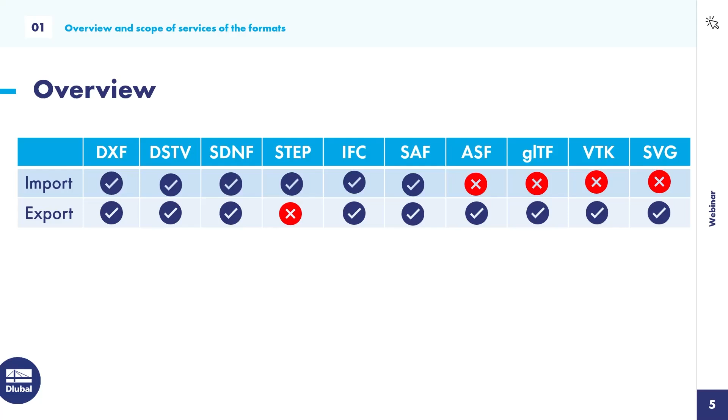We will start with the DXF interface and a brief overview about the import and export possibilities. Concerning the import, we mainly support the import of nodes and lines. You can, however, also import members from the DXF format. To do so, you have to mention the cross-section and optionally the material name inside the layer. Then we can read this information and automatically create members. We can also import surfaces from AutoCAD, however, only if the object is a 3D face element.

Then concerning the export capabilities, here we mainly export nodes and lines. So members with the graphical rendering in RFEM will be exported as a simple line, not as a 3D rendered object. We can also export dimension lines, and concerning the results, for example, the FE mesh or the deformed structure, as you can see here on this graphic.

One more information regarding the import. There are 2 options. We can import the DXF information directly, so you get the lines and the nodes and so on, or you import a DXF as a background layer. That is, of course, also possible. Now I would like to give you a quick demonstration of the import and export. I'm starting with the import.

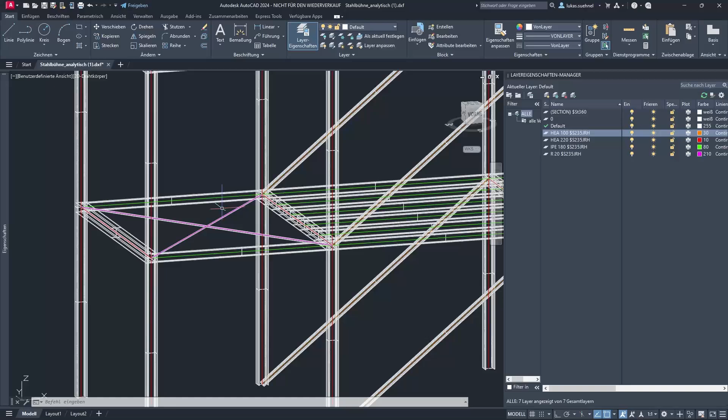And I also assigned the cross-section and material name to these layers, as you can see here on the right-hand side. The HEA 100, then the $ sign that splits the cross-section and the material name, and then the material description or name. So if you have that, you can import this into RFEM 6. I already saved it as a DXF file, so there's nothing to that.

And then I can go into RFEM 6, go to File, Import, and use here DXF2. I can select the DXF file, and then I will get a little dialog that allows me to define additional settings. First of all, I want to rotate the structure because otherwise it would be upside down due to the global coordinate system. I want to generate the members based on the layer names.

And I also want to import only selected layers. So in that dialog, I already see which layers I have inside that DXF file, and I'm not interested in the default or the specific section layer. I only want to import the center lines, basically.

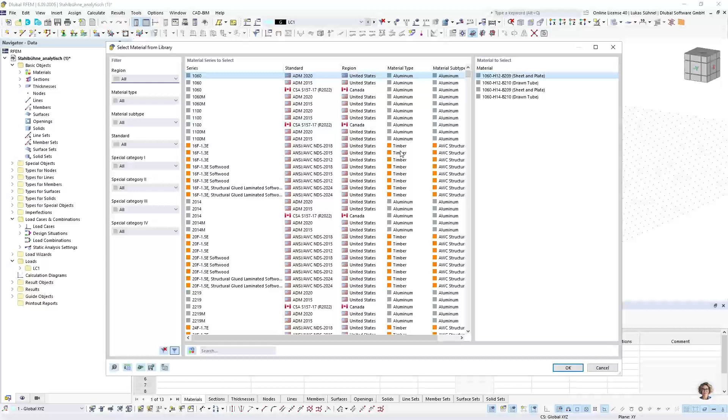So let's do that. We'll take a short moment. The cross-section or the conversion tables will open. So in case your layer names do not match the cross-section or material name inside RFEM, you can define them in this conversion table, assign the related Dlubal material or section, and then you can import it. Should be filled correctly on my side here already, so I don't have to do it.

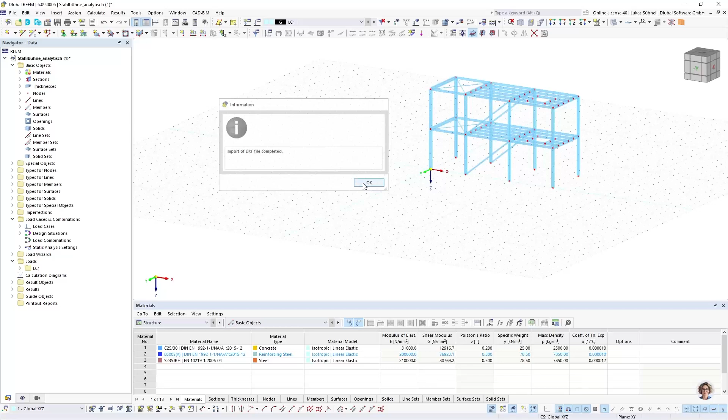I just click OK. And now RFEM will lock itself. You can see it on the bottom. Everything is grayed out. I can't do anything, and this is on purpose. We are using our API to read this data, and while the API is working, you're not allowed to do anything in RFEM. So we are locking the screen. The import is finished, and you can see the same structure here in RFEM now.

We can briefly check the imported data, for example, by using a specific display function. I can use colors of rendered objects by object property, member section, for example. And then I can quickly double check if I have the right sections in my file. So basically if the conversion was set up correctly.

Or you are running additional checks, for example, under tools, you have a model check for identical nodes. It shows up quite often that in DXF files, there are nodes very close to each other or multiple lines on the same location. And we have these model checks that can help you to find these situations. For example, you can set the tolerance for identical nodes to 1 centimeter, and then you can check if in a radius of 1 centimeter there's more than one node, and then you would see those nodes here. It's not the case here, so should be fine.

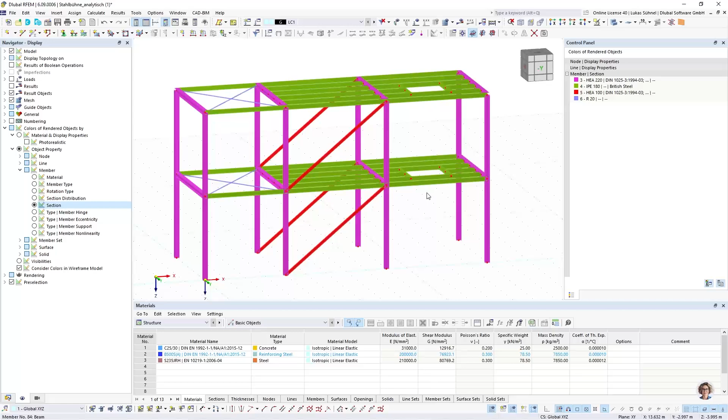And with this data, with these native objects, members, lines, and nodes, you can continue with the loading, the supporting, adjusting the structural model in general, of course. That is the DXF import. And now I also want to show you the export. So let's open another file. I have them prepared, of course.

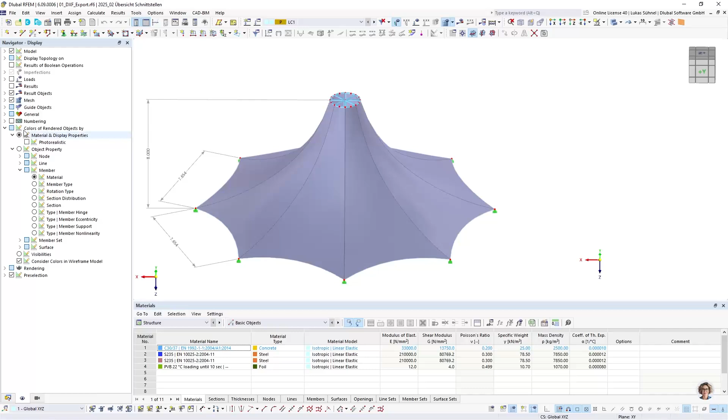That is a membrane structure. A little tent, basically. And let me show that quickly. All right, so here already with the results, but I can turn them off. So maybe just some brief information. In RFEM 6, you're able to run form finding calculations.

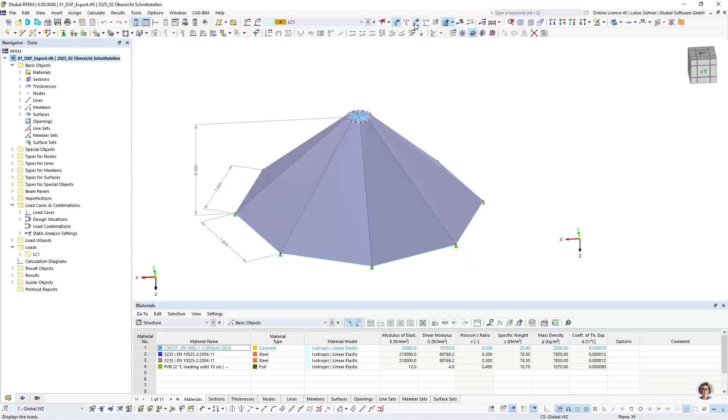Therefore we have this specific add-on, form finding, that allows you to model these membrane structures as we have it here. You can support these membranes on the bottom, for example, via a cable, and on top via this supporting circle of beams. And then you need a pre-stress load case, and inside the pre-stress load case you can define the target force or the target stress or the target sag of membranes and cables, which has been done here.

And then you can run the form finding, and RFEM will calculate the shape that is required to fulfill these predefined loads. Now that is the result, and it is quite common to export these structures into AutoCAD for additional drawings and so on. So we developed not only the DXF export, we also included here options to export the deformed shape.

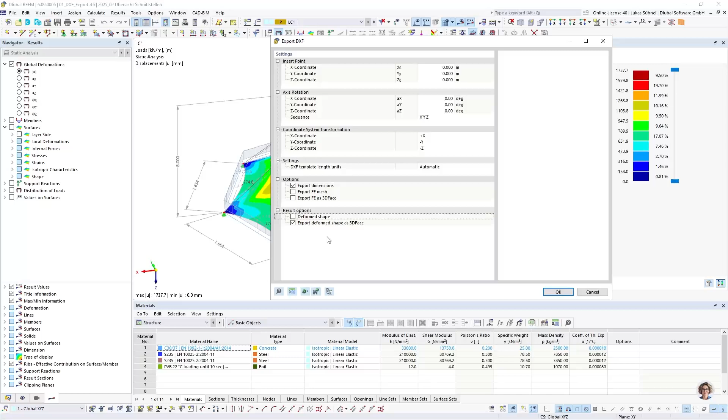Put it on my desktop. And I have here various options for the export. I can export dimensions. I can export the original FE mesh, so the FE mesh that we create before the form finding analysis, but I'm not interested in that. I can also export the deformed shape, or actually I'm just looking for the deformed shape as a 3D face, which helps me with the rendering. So these are the settings.

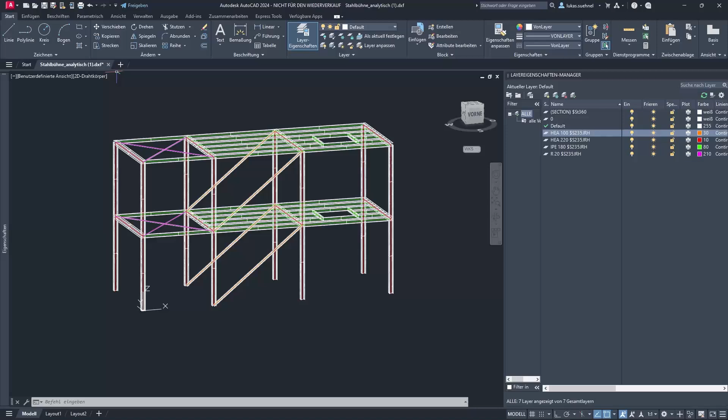I press OK. RFEM should be locked again in a second, because we're again using our API. Yep, happening now. And as soon as it's finished, it will unlock and give us a message, export is done. Now I can go back into AutoCAD, maybe close this file here, and then I can open the deformed shape DXF. Let's zoom in. So that is the result.

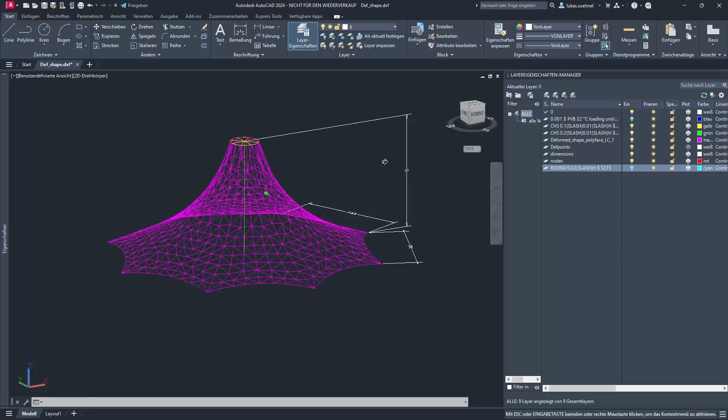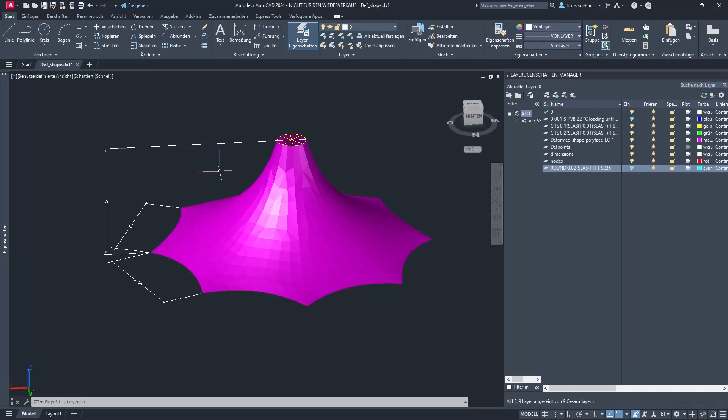Now I can hide a couple of layers which I'm not interested in, these cables, for example, on the bottom. And I can display the deformed shape, and I can also use a different rendering setting for a nicer graphic. We can also see the dimension lines. It's not just simple lines, it's a real dimension line where I can change the settings and so on. All right, so far regarding the DXF interface.

Let's already go to the next one. And the next one is the DSTV interface. The DSTV file format was developed and introduced by the German Steel Construction Association. I have a product description from 2000, so it's a rather old file format, but it has many strengths when it comes to exchanging pure beam structures.

It contains relevant information such as cross sections and materials for the members, but also supports, hinges, eccentricities, member types, sets of members, member elastic foundations, and concerning the loading, the typical nodal loads, member loads, imperfections, and of course load cases and combinations.

Due to these diverse options and the simple definition inside the format, which I will show later, it can be found in many programs. So many of the steel detailing, but also other programs, use or offer an import and export into the DSTV file format. And I listed some of them on the bottom: Tekla, HiCAD from the, let's say, steel detailing area, then CADWORK, HSB CAD, SEMA from the timber construction world, but also additional programs, BuildSoft, Infograph, and many more.

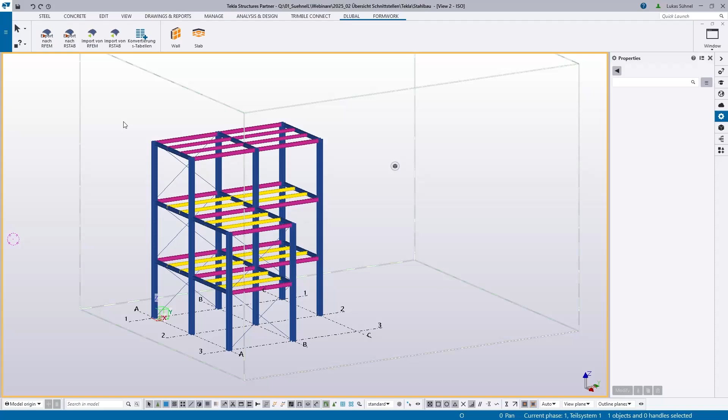It's working quite well. But a direct interface always requires having both programs on the same PC. So you need to have Tekla and RFEM on the same PC. That is not always the case. And then a file format for the data exchange would be quite handy. And we have that for Tekla. And I want to show how you can do it.

So first of all, you select those objects that you want to export. Then you can open this menu, go to export. And now, not so well known, I would say, is the FEM export. And here you find the DSTV file format. You can select the output file location under the parameters tab. So I put it on my desktop.

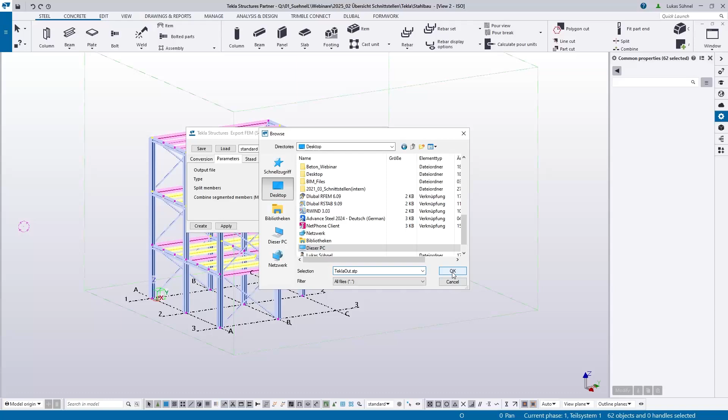Tekla out. And little hint, add the .stp description here, then it's easier to find it in RFEM 6 when we are importing it. Press OK. And then I guess you have to click on apply and create. And the export should be done. Let's have a brief look. I will open the file.

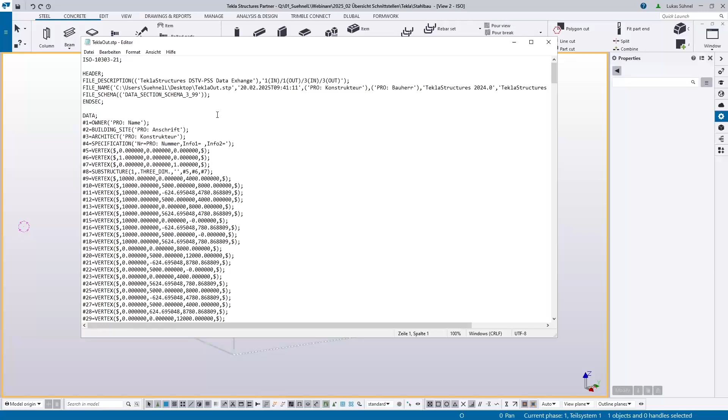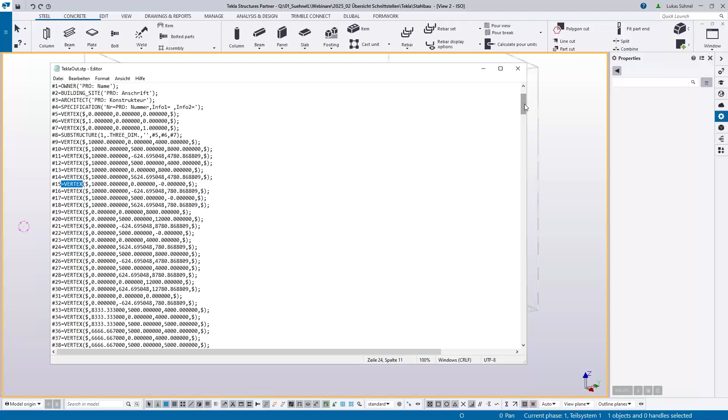This is how the file format looks. So you can simply open that STP file with the editor, and you can see the program it originates from. You can see maybe even the person who created it, the version of the program, and then you get a long list of nodes. So vertex is basically the node. Coordinates, then we have the material, we have the cross sections. Here the focus is usually on the name.

Because we are converting the names anyway, it's not about importing the cross-section values or something like that, which can also be documented in here theoretically. Tekla doesn't do it. And then after materials and cross-sections, we have these elements, and these are basically the beams. So the beam or the member type, start and end node, the cross-section at member start, cross-section at member end. So it's possible to exchange also tapered members.

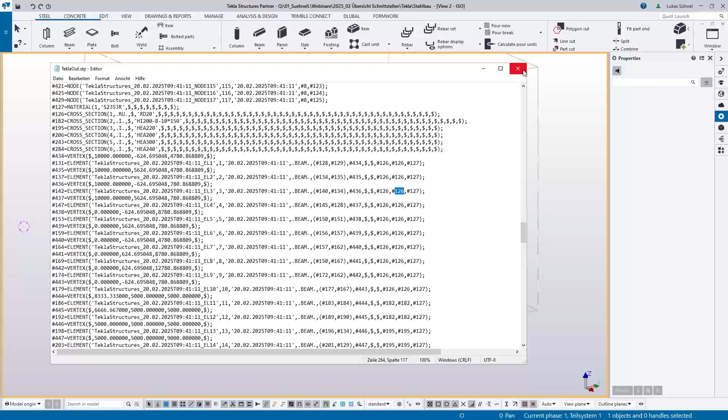And further down, there can be more information about loading and hinges and so on, which is not the case here. All right, so let's import that file into RFEM 6. I'm closing this membrane structure. File, import, DSTV. Desktop, just navigating into my folder, Tekla out. Okay.

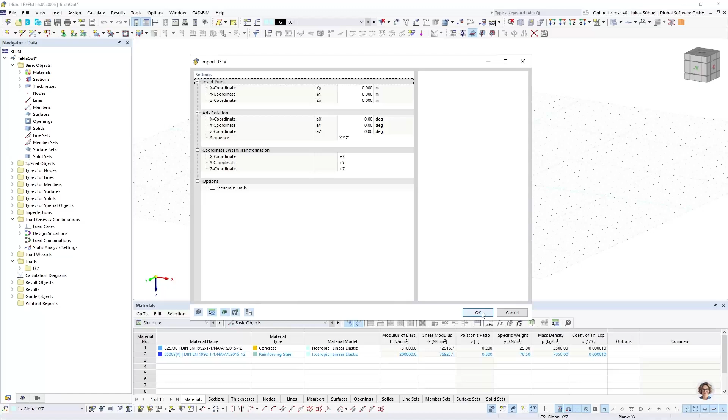RFEM will be locked again after I press OK in that screen. So I could import the loads, but there are no loads inside, so I leave this toggle unchecked. Then again, conversion tables to match the section names. I did that already here. I can press OK, and the import will start. All right, so import finished.

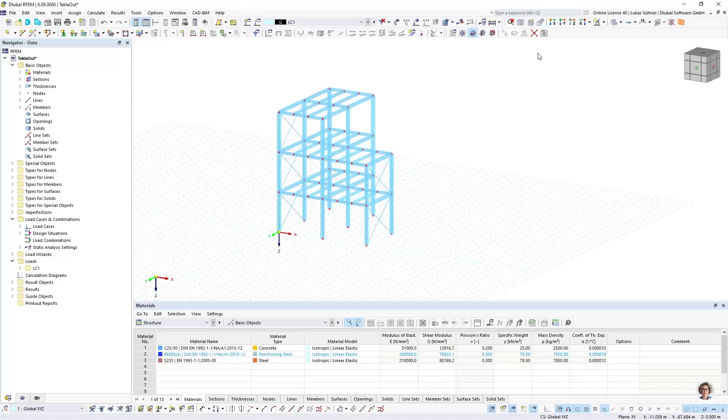We have a couple of free nodes which have no use in that moment. I can get rid of them by going to the edit menu, select, and then we have an option free nodes. And then all of these free nodes will be selected, and I just hit the delete button on the keyboard and they are gone. And now you can see we have the same structure as we had in Tekla.

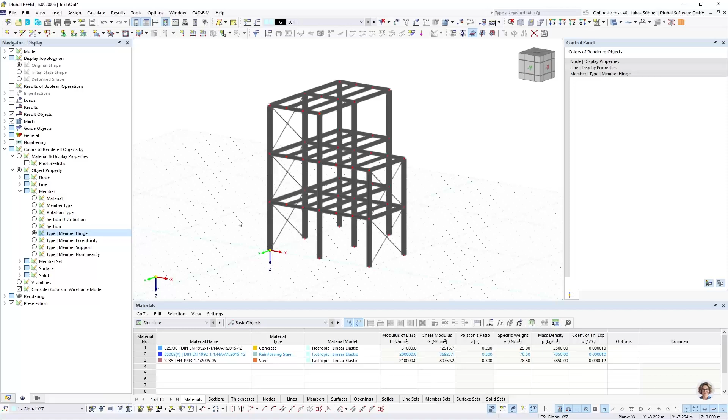Again, I could double check the content by using some rendering functions for the cross sections or member types. Here I can see it's just member type beam. And if I would select the member hinges, there are no hinges assigned. So I got a model from Tekla where every beam is connected rigidly to the next beam. That is not ideal. In RFEM, I would continue now with adaptations concerning this analytical model.

Some of these adaptations could be the following. Let me show the rendering via material again. I could select all these bracing members and assign them the tension member type, and this can be done rather quickly.

I have these synchronized selection options in RFEM, so if I click in the data navigator onto a specific cross-section, all members with that cross-section will be highlighted. There's no need for me to manually draw little windows. Just select the cross-section, then double click on these members and change the member type to tension member.

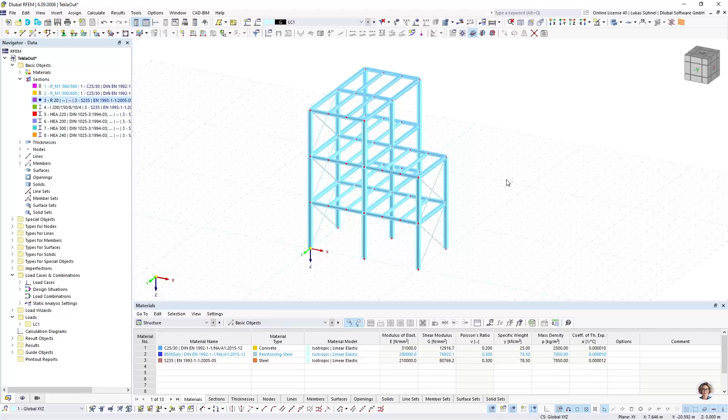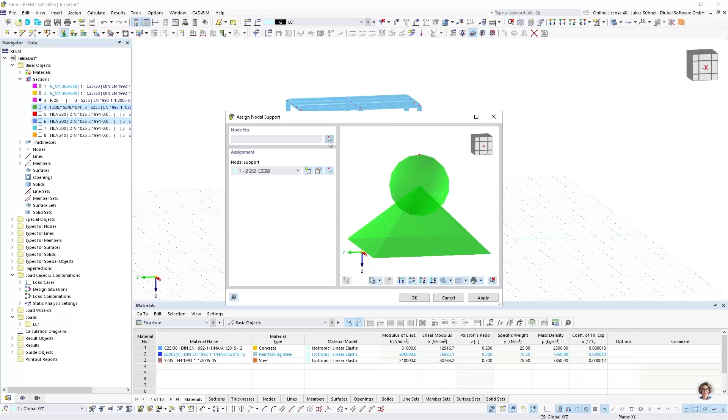The same could be done for some of these smaller beams or horizontal beams. I'm selecting these cross-sections here, double click, and define the member type as truss, which means it is a member with hinges for the bending moments at the end. I could assign supports and all the things that are required, and then assign loads and so on.

And of course I can also export this file again into the DSTV format. File, Export, I put it again on the desktop, RFEM out.

Again, takes a little moment. All right, RFEM out - I can open it with the editor.

We have, in general, the same information inside here, but we sort them a little bit differently. We have chapters: coordinate system, nodes, then cross sections, materials, and again the members. You can see here now we have tension members, truss members, beam members, so there is definitely modification visible.

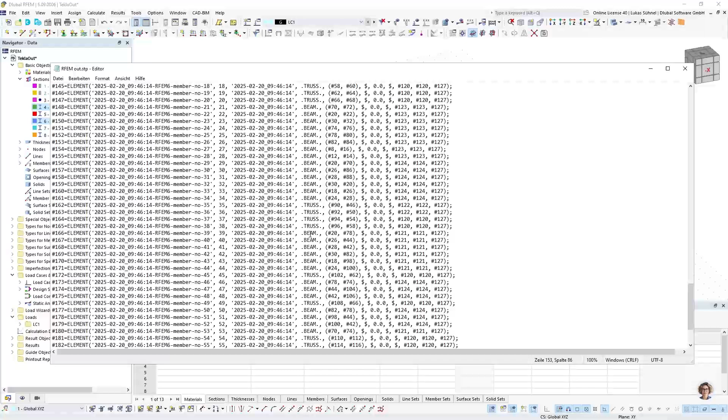This file can of course be imported into any of the other mentioned programs. All right, let's go to the next file format, the SDNF format.

The name should be Steel Detailing Neutral Format, so a neutral format for steel detailing. It was developed by Intergraph for the purpose of exchange between structural analysis programs and steel detailing programs. You can see under additional programs that it is mainly used in steel detailing programs like Advance Steel, HiCAD, Tekla Structures, Aveva E3D, and so on.

It can be used for the transfer of beam structures - materials, cross sections, uniform members (no tapered members), and eccentricities - but it also supports surfaces, including openings, at least on our side. The format has more capabilities, for example connection details, curved elements, and loads, which are currently not supported in our export or import.

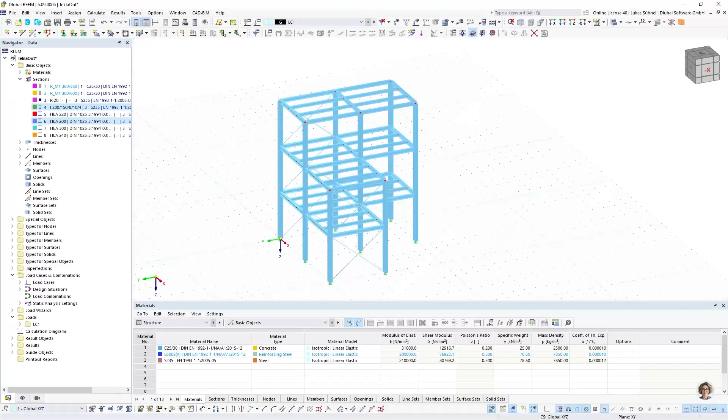Let me also give you a brief demonstration of that format. I will close this file and open another one, which is this one - like a cantilever truss structure, if you want to call it that way.

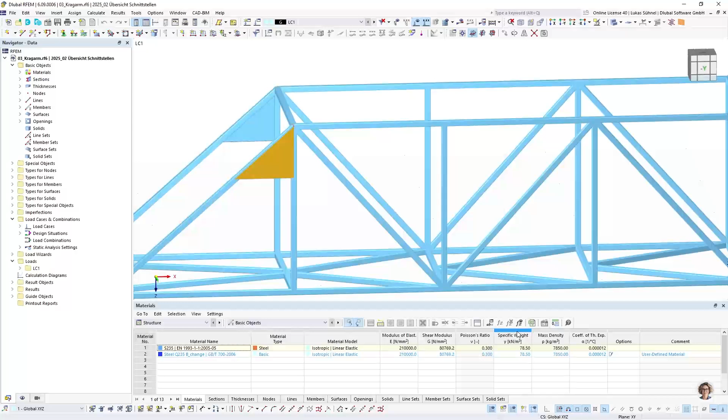So mainly beams, but also some surfaces here, 8mm thickness, to get a more rigid steel joint in that area, and then on the end also a surface with an opening. That is maybe the structure that we want to give to the steel detailing person to save a little bit of time with the modeling. And we can do that.

My plan is to import it into Advance Steel, and for Advance Steel the ideal format from our side is the SDNF format. So I go to File, Export, SDNF. Under the desktop I will save this.

How do we want to call it - I want to export linear members, surfaces, and openings. I press OK, and while the export is running I will look for Advance Steel on my PC.

All right, let me call up Advance Steel. I can use this menu for importing files. Here, however, I won't find the SDNF format - you can find it under the Export and Import menu or tab, and then you have additional formats: IFC, CIS/2, SDNF, which we are going to use, but also the DSTV format and others.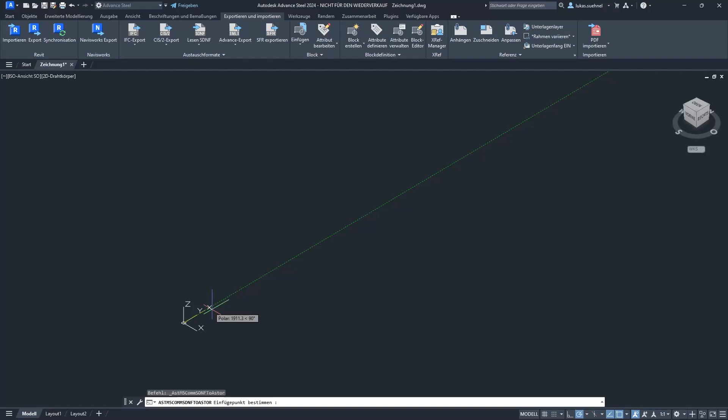Let's see, sometimes we have to do a cross-section conversion similar to our program. The Advance Steel is reading the cross-section names from the SDNF file, and if it doesn't know what Advance Steel cross-section it should be assigned or use, then you have to assign it manually. I did that for the German webinar already, so the window didn't pop up here, but we have the cross-sections, which is the most important part.

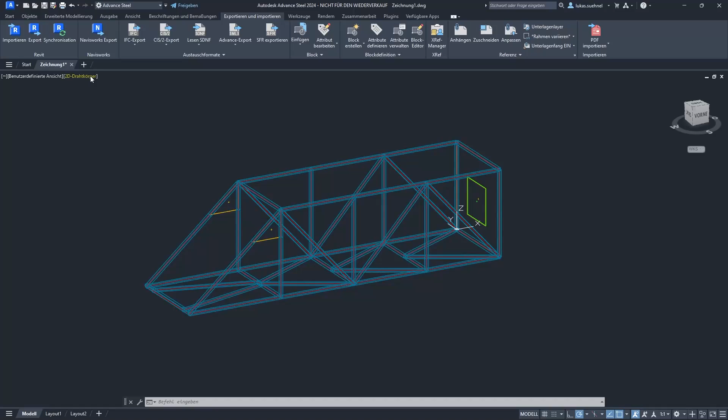Now let me change the rendering a bit, and we can clearly see that the import was successful. I get the same structure, and it's not just graphical objects - we can also see the information here, so thickness 8 mm. I can display the cross section.

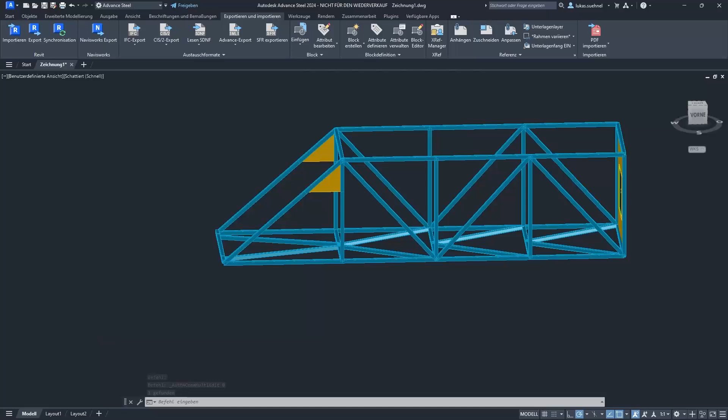Hollow cross section 40 by 3. So we got the information that we need, and now we can continue in Advance Steel and assign, for example, the connections.

This could be done via the advanced modeling, and then I have here a connection manager, which shows up on the wrong side. Okay, and for example, I want to have a connection in that area.

So I could select here, let's say, fin plate with 3 connected diagonals. So I select the main beam, then the first diagonal, second diagonal, third diagonal. Then I will get a preview of my connection. I can rotate it a bit.

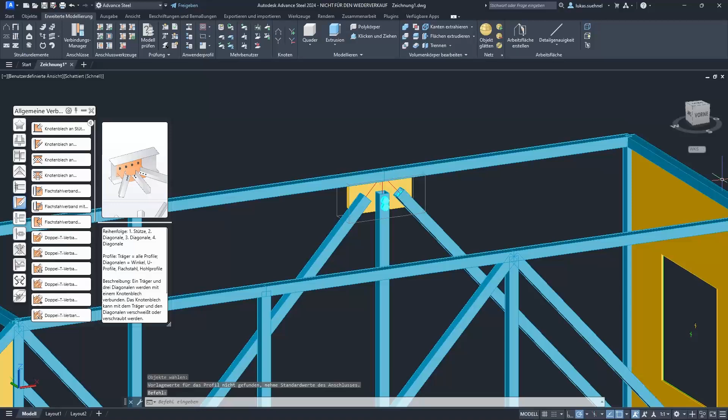And modify it further in the other dialog that shows up. For example, I could modify the fin plate, or where is it? The amount of screws, the diameter, so maybe diameter 12, just 1 screw or bolt. And when I'm done, I can close it and I have my connection here.

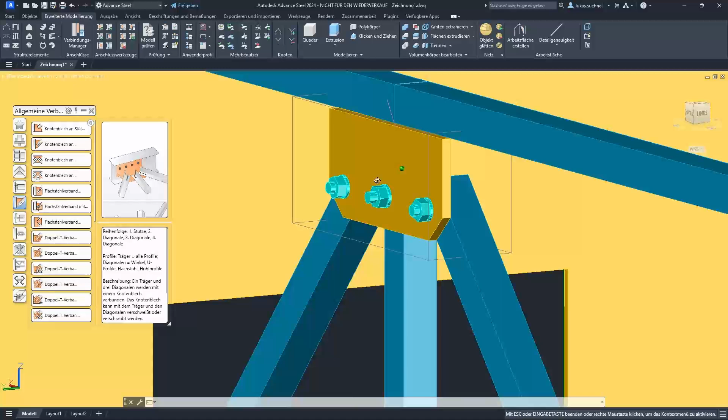So it's clearly visible, even though we exported based on the center lines of the beams, which we can see here, that is not an issue in Advance Steel. It doesn't matter, it will cut or shorten the members according to, for example, the steel joint that we define in here. So it's definitely usable.

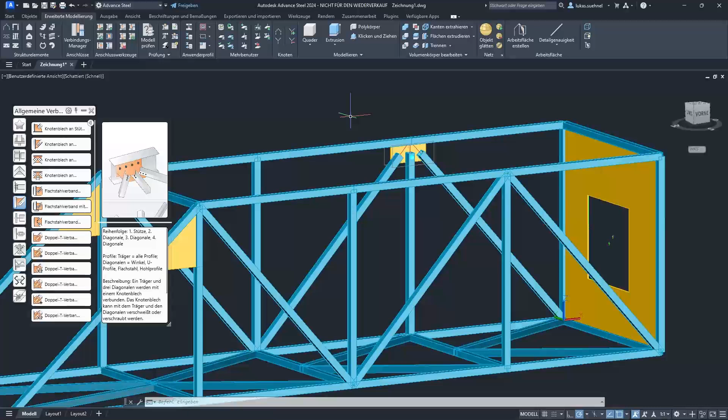Okay, so far regarding the SDNF format. Let's have a look at the next one. The next one is the step file format.

We support only the import of that format, not the export currently. And concerning the import, we are reading nodes, lines, surfaces, and solids.

It is a format mainly for the use of exchanging solid structures, 3D objects. Cross-section materials and members is not exactly the purpose of that format.

You also see that when you check which programs offer step imports and exports, usually it's common or general CAD programs, or CAD programs with a mechanical engineering background, like SolidWorks, Inventor, CATIA, Siemens NX, Rhino.

And again, it is for the exchange of solid models. Usually when you model something in, for example, Inventor, even though it's maybe a 3D hull where you think of beams, cross-sections, IPEs, and so on, when you export it into the step format, you get solids for every member.

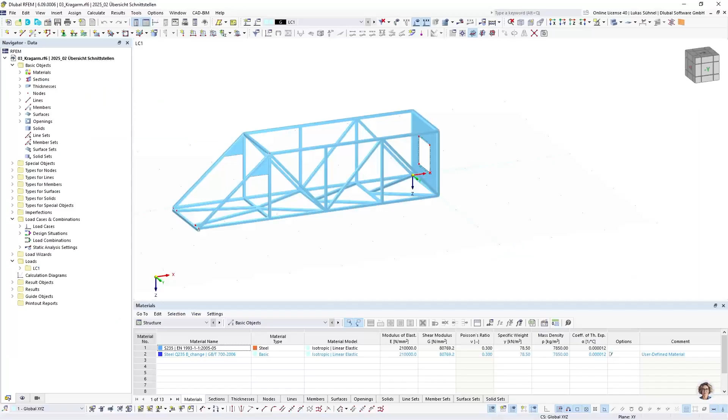And I want to show it, of course. So I go back into RFEM 6, and I'm going to import the structure that we just saw on the PowerPoint. So I will open here the step import and go into my folders and run it.

Maybe while it's running, one more information that I should mention, because it is a common question. There are two formats with the same ending. The step format, which is for the exchange of solid models, STP, sometimes even STEP. And we have the DSTV interface also with .stp.

This, however, as I said, is mainly for beam structures. So they couldn't be more different, beam structures versus solid models. Sadly, they use the same file format ending, which is causing confusion, because often we have customers reporting that the step import isn't working, but then they got a DSTV file, or the other way around.

So make sure to check which file format really has been exported from another software, and then use the proper import in RFEM. The good thing is you can also open these step file formats. It's the same logic, you can use the editor to open them, and then you somehow see, is it a DSTV file or is it a step format?

All right, concerning RFEM 6, the import is done. We can see the structure here. Let's change the rendering. I should have rotated it before, but it doesn't matter.

We got the solids from the step file into RFEM 6. We can see it also here. There are no members, but we have a list of solids currently displayed in red color, which usually means something is not correct.

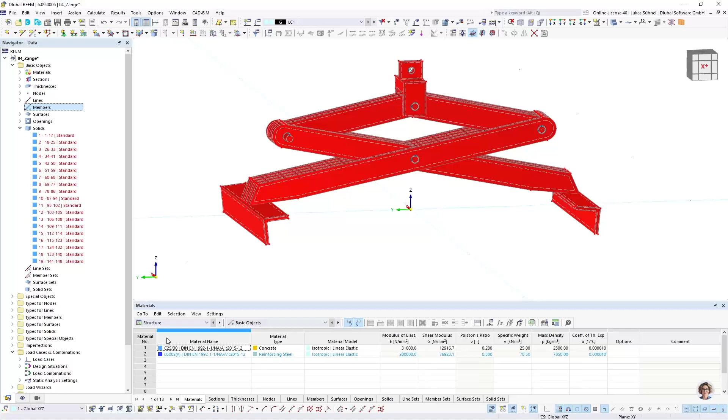We can check it. We can just select one of the solids, double click, and we can see directly the material is missing. As I mentioned, materials won't be imported on our end, but it's of course easy to assign a material. Let me use an S235. And with that information, the solid is valid.

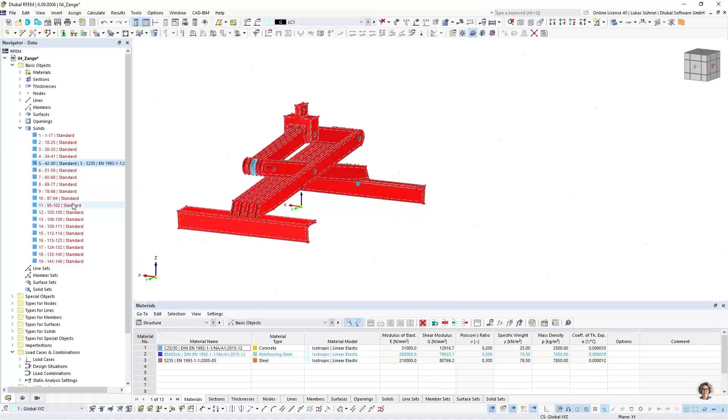I can do it for another one. Just a second, this one, for example. Edit, and then I assign the material. I can, of course, use multi-selection and do it for all of them. For today, 2 solids should be enough, because I want to show how you can use the step file now.

Let's display these 2 solids. Selecting them again in the navigator, and then just these objects and related objects. I can hide the other information in the background, and we can see we have the solid from the step file here.

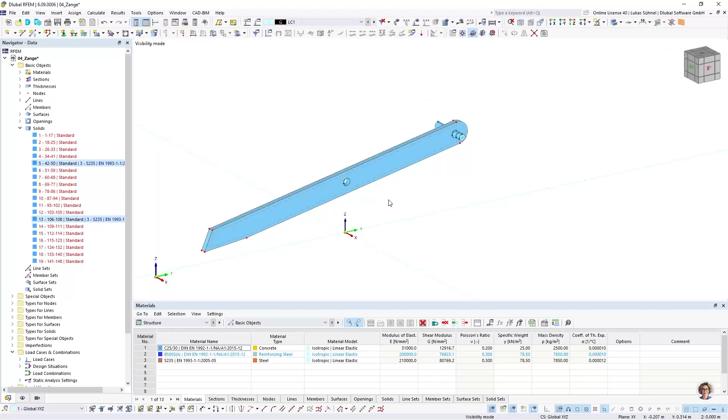In theory it is a valid solid. The question is if you first want to design this structure as a solid structure, or if you want to simplify it into maybe surfaces or beams. And if you decide to use solids, you still have to manipulate the structure. For example, in that area we have the bolt and the solid, but there is no information about how the forces should be transferred from the bolt to the metal plate.

Here we would use surface releases or contact solids. So usually, in 99% of the cases, you have to do manual adjustments after a step import.

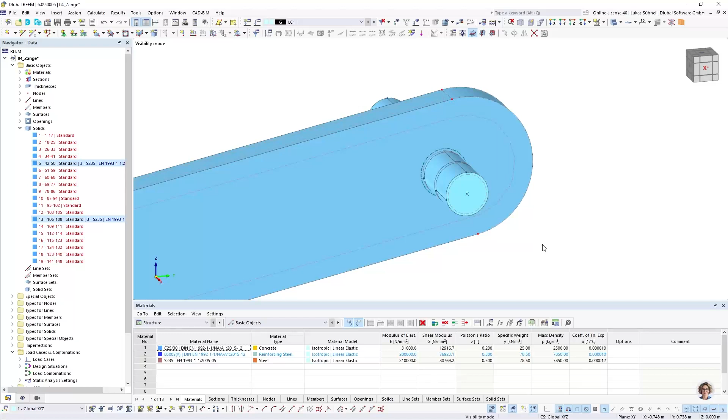In my case, I would not use solids. I think a surface and a beam structure would be fully okay, or would be enough. I want to simplify it. And how can I simplify such a structure here?

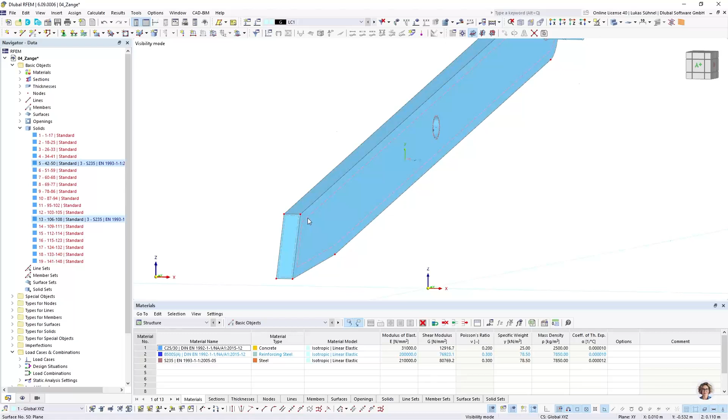Here I have a plane, let's say a plane solid. So I can easily select one of the faces, go to Edit, select Related Objects. Then it will also select the openings and everything that is related to that surface.

And I can use the drag and drop functionality. So I just keep my mouse pressed, hold the control button on the keyboard, and then I can create copies of that object that I selected. And I will place it in the center, for which I have a snap point. And then I have this additional surface.

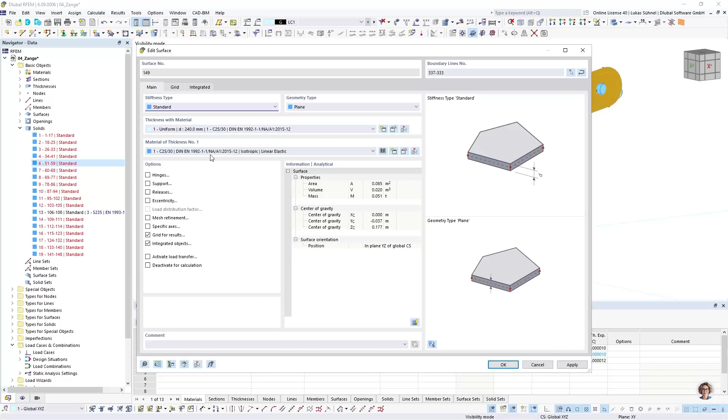That's all I need for that object. So I can select the solid here in the navigator and say delete with boundary surfaces. And then only the surface is remaining. I can assign thickness and a material. For now, I don't care how thick it is and so on, but I could define it here. And then it's, of course, a valid surface.

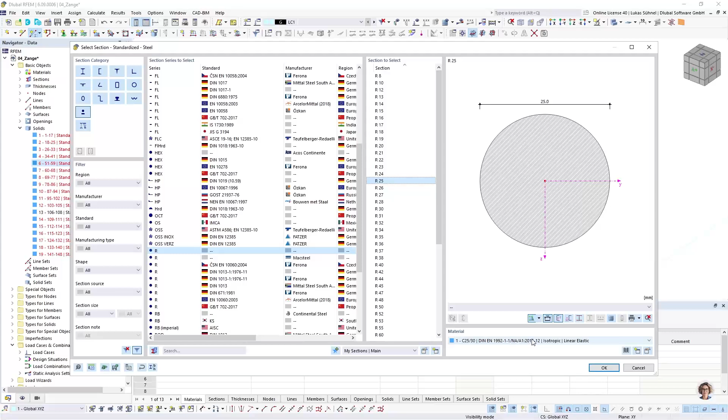Same for this bolt, I don't want to use a solid here. I want to use a beam. So I go into my library, select an R25, which is the diameter of that bolt, R25, with the related material. And I am catching here the snap point, the center of a circle. That's the snap point I can select. Same on the other side.

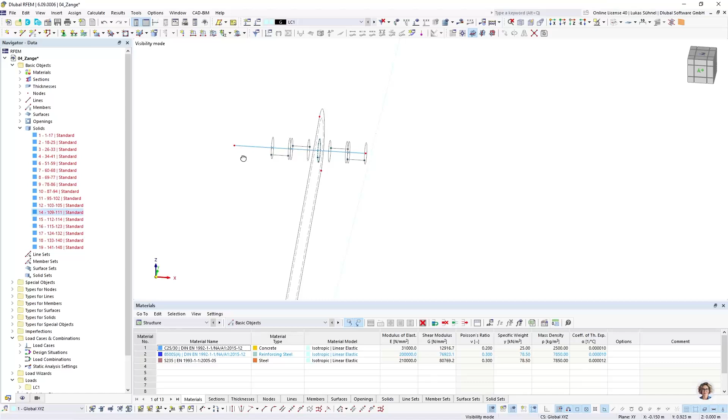Then I have here a member, and I can delete this solid with its boundary lines. And then we can change the rendering. There are some lines remaining. I can simply delete them.

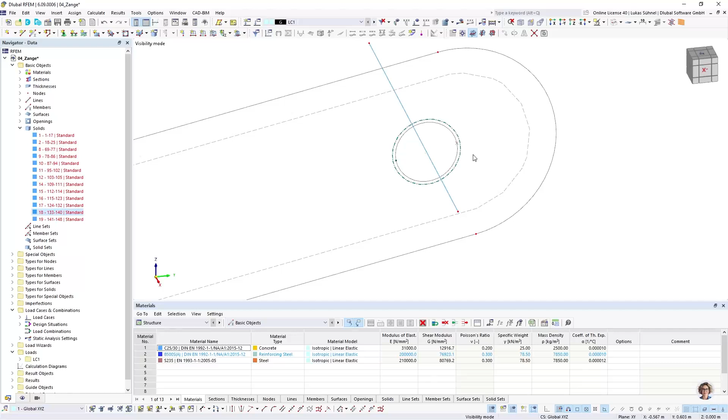And I have my simplified surface and beam structure. Concerning the connection between this bolt and this metal sheet, I would use maybe a row of members of beams or coupling members to create a proper force transfer. This would be my simplified approach for that model.

Let's display everything again, and you can easily copy this surface to the other two sides. Do the same steps for the rest of the structure, and I think it is a valid use case, the step import.

All right, so far regarding this interface. Let's switch to the next one, which is the IFC format. It's the format for the construction world, civil engineering world. We support the import and the export, of course. Concerning the import, we are able to import the IFC files from versions IFC 2x3 or IFC 4.

We can import the structural analysis view and the reference view, which is not so well known. Usually people or customers only know that there is the IFC format, but it's not so well known that it has different views, or let's call them subformats.

What is quite common is the reference view. This is what you usually connect with the IFC format, architectural representation of objects. So every object is a 3D solid, basically. We can import that, of course.

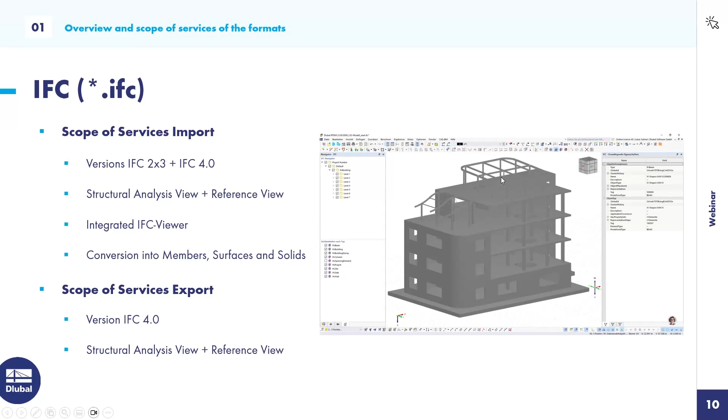I won't show it live now. First of all, due to the time, but second also because I already gave a webinar about this topic. So more details about this can be found in this webinar.

So the next interface is the SAF interface. It's the structural analysis format interface developed by Nemetschek, in cooperation with other programs, mostly structural programs. And it is a file format for the exchange of the analytical model. We support the import and the export. Here the version 1.0.5. It's not the latest one. We are aware of that. I'm quite sure we will run an update of the interface to the current version 2.2.

Nonetheless, you can use it to import and export model data such as members, surfaces, supports, hinges, eccentricities, but also load cases and loads, node loads, member loads, surface loads. It is similar to the IFC structural analysis view. So the main purpose of that format, as I said, is the exchange of the analytical model.

So it could be a use case between the structural engineer and the checking engineer, which is quite common here in Germany. Like a second instance that is checking the structural calculations. So that could be a use case.

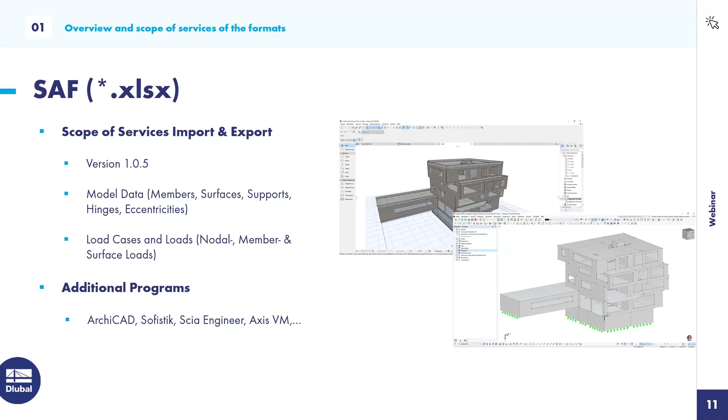Okay, the next format is the ASF format. So we kind of remain in the Nemetschek world and Allplan world. It is a format especially for the data exchange of reinforcements, mainly for Allplan, but I think other concrete detailing programs also support the ASF import. So what is the scope of services here?

We can export our surfaces and the required, the provided, or the not covered surface reinforcements into the ASF file. And then you can read that ASF file in, for example, Allplan. There you get, let's say, dynamic graphics. So you can see here, these are basically the required reinforcements on the top or bottom side of the surface. And the colors represent different required As values.

And now you can define the reinforcements, for example, a mesh reinforcement inside that surface. And these graphics will then show the remaining or the not covered reinforcements. So you can graphically see where something is missing, where you have to add additional rebars. That is the use case.

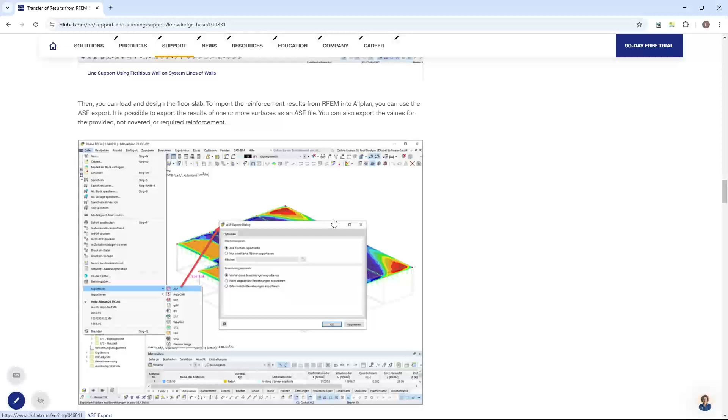This use case also has been described in a knowledge base article by my colleague Paul Sivolgin. He wrote about the transfer of results from RFEM 6 to Allplan using ASF files. Quite a nice article. Feel free to read it. It contains the most important information and the dialogues and how you can import it into Allplan. So I won't show it live. I think there's a good article on the website.

All right, now let's come to the last three file formats that we have: the GLTF format, the VTK and the SVG. All three file formats are, how should I say, a byproduct of our own development. We are using them mostly internally for other use cases, but we thought since we are creating them internally, why should we not offer them also as an export option inside RFEM 6?

And to give you a brief overview about the possibilities with these formats, I wanted to include them. Let's see if they have a use case for you. I want to start with the GLTF file format, which is a file format for the export of the 3D scene, as we can see here. So you get a 3D model out of it.

You can visualize the model data, loads, results, but also steel joints or the reinforcements. So you can more or less show anything that you can see in the graphic representation of the model inside RFEM or RSTAB. And you can display that scene either via the Windows Explorer or the 3D viewer. You can also use VR glasses to fly through your structure. We are using them, for example, on our website.

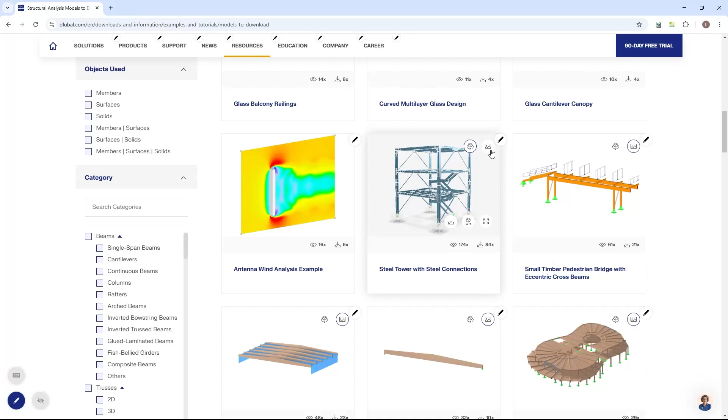So we have the option to rotate or navigate through that structure by clicking on that icon here. So you can zoom and rotate the structure and so on, so you get a better understanding of it instead of just looking at the picture. And in the background, as I said, we're using this GLTF format. We are also using it if you want to display the file in the Windows Explorer. So that is how we use it.

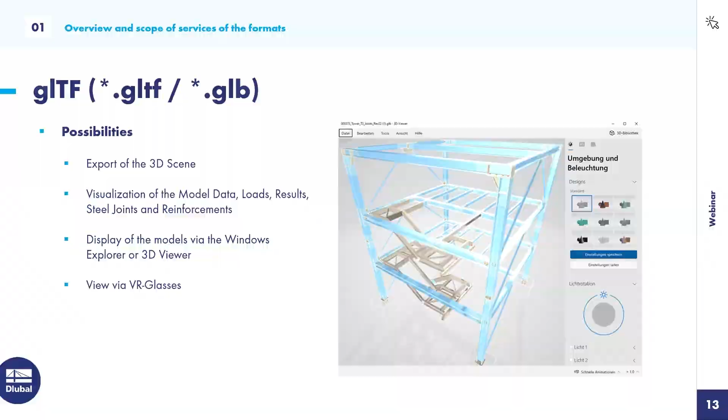And we offer now this export also in RFEM 6, and I want to show it here. So let me close this file and open this file with the steel joints. It's quite a nice file because every connection has been designed with our steel joint add-on. Maybe while it's opening, we have a new steel joint add-on here in RFEM 6, or we developed it for RFEM 6.

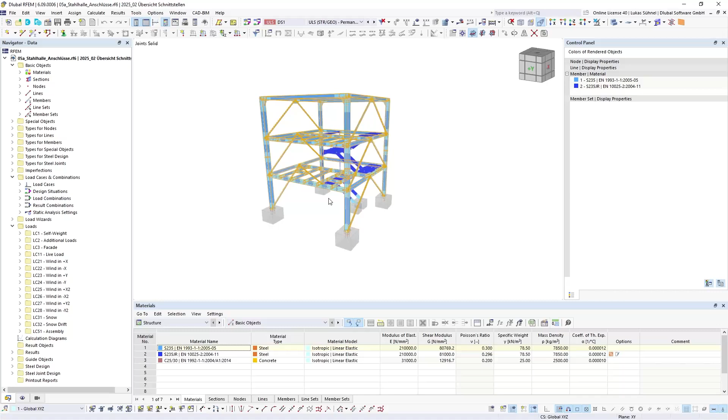The benefit is that it's possible to design 3D joints. So it's basically unlimited regarding the amount of members that are connected to a joint, and the members can come from any direction. It's also not limited to specific internal forces, so any force that you have in the internal beams can be considered. And this is the new steel joint add-on. You can see here, every joint has been designed. That is quite a nice graphical representation that we have here.

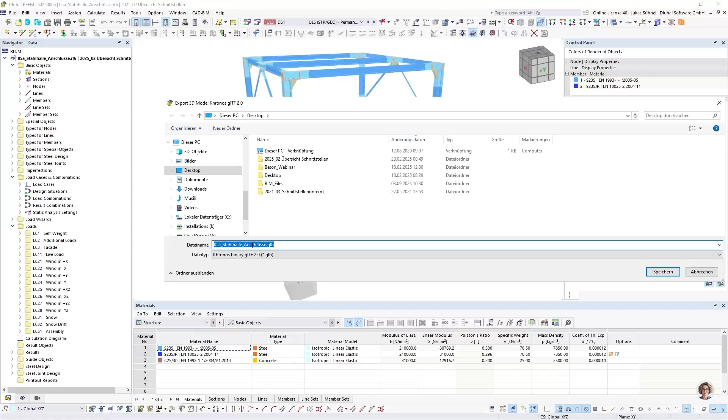And the use case of the GLTF format could be that you want to present your work to the owner of the building, and therefore maybe you want to have a nice graphic, and this can be created via the file export in GLTF. So I save it on my desktop, press save, and then I can open it. I'm opening it via this 3D viewer, which should be a default program when you have Windows on your PC. And then you can see that you can rotate through the structure.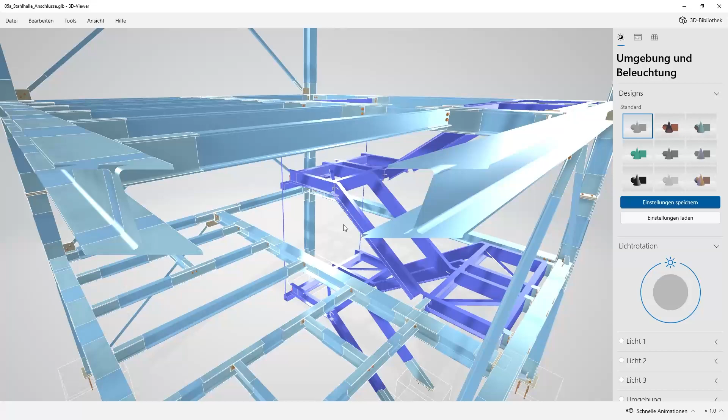You can zoom in, and it's quite nice to navigate through the structure. What you do not get is additional information. As far as I know, it's not possible to click on objects and read the properties. It's really only for the graphical representation, for viewing a structure. Okay.

So far regarding this file format. We also have an export into the VTK file format. The way we implemented this export, the VTK file format is kind of like a container for simplified model data and results, so mostly for the results. And we are using it for the communication between our RWIND program and OpenFOAM.

RWIND is our standalone program, which can also be integrated into RFEM 6. It's like a virtual wind tunnel, so you can calculate the wind pressure and suctions on complicated structures and shapes. And this analysis is done via OpenFOAM, which is a numerical solver for fluid mechanics analysis.

You can display these results that we are exporting with the ParaView viewer. And this is what I want to show here. So let me open a file again. I think this concrete building, for example.

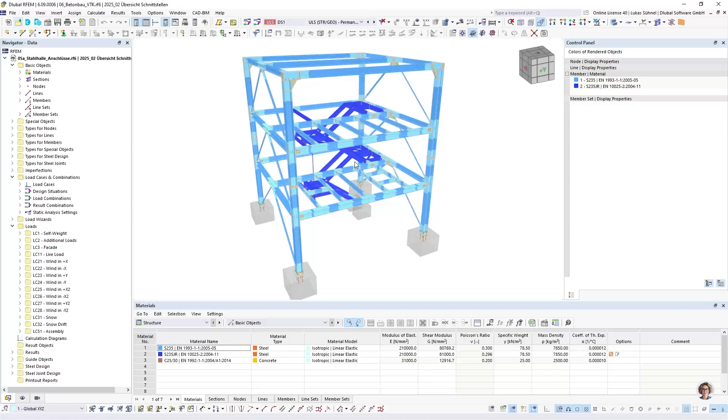And for that, let's say office building, I calculated the results. So I have here the full range of results: deformation, member forces, internal forces. I have, of course, also surface results, stresses, forces, deformations, all these kinds of things. And all these results can be exported into this VTK file format.

So you just click on File, Export, VTK. Let's name it Results, save it on the desktop. It will take a short moment. And then you get on your desktop this results.vtm file, which is linked to, where is it? Yeah, to this results folder with additional files.

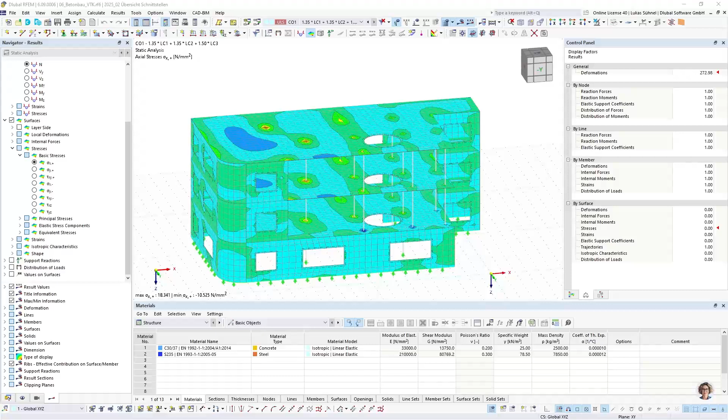And you can open the VTM file in ParaView. So let me show that as well. It's a freeware, you can download it. Just Google ParaView and download, and then you can open the results.vtm file. You can open a lot of files. It's quite a good viewer. Now I'm interested in that file.

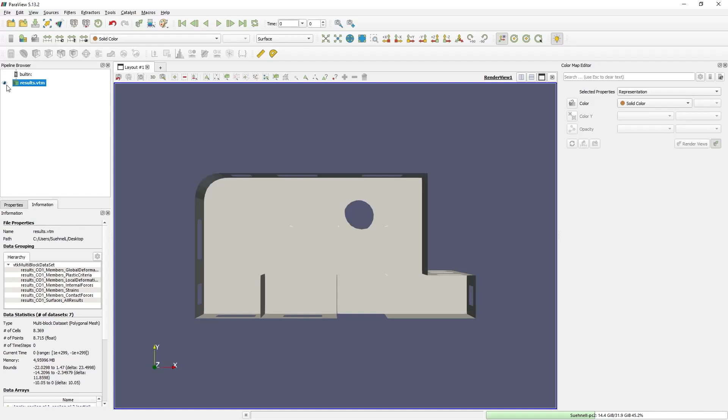Press OK. Then I activate my file, and you can rotate it. You see it's like a simplified representation of the surfaces and the beams, or the columns in that case. And the good feature here is that you can select the results that you want to see, and you get them in a graphical representation.

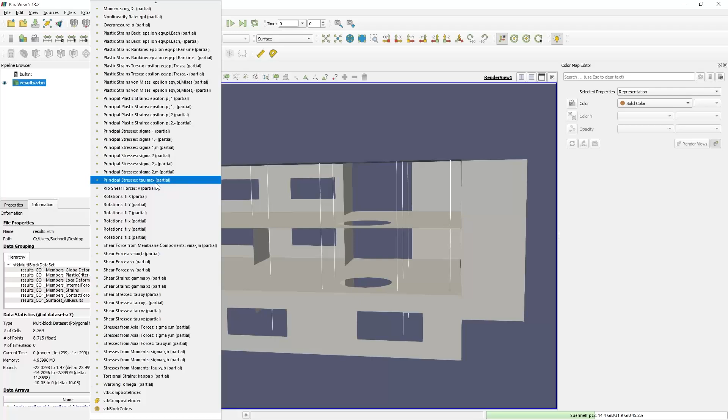So for example, interesting could be, where is it? Displacements, the global displacements. And then you get this rendering. You could change colors and so on. But in general, you can display these results here, and we can double check it with results in RFEM.

So let's display here the deformation as well. And you can see mostly in these areas we have the biggest deformations, and at the front border of these slabs, and the same results we can see here.

So what's the use case of that file format? I could imagine that in case you want to display the RFEM results in your own program for some reason, then you have, in my opinion, two options. You can use our API to read the results that you want to import into your own program, or you're using this VTK file format to export the results into that basically result container, and then read it from that file into your program. That is the use case I can think of.

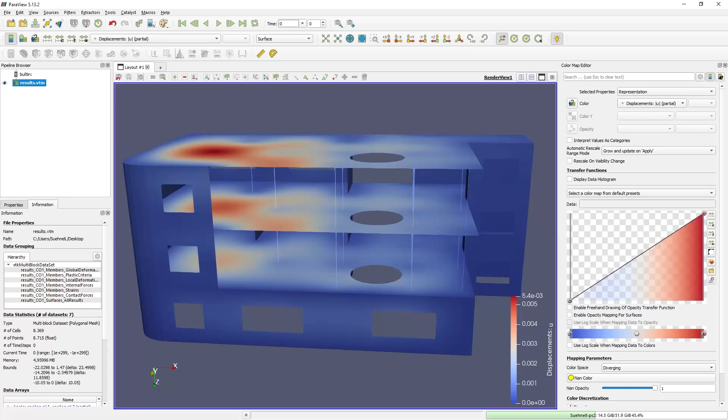Okay. And now concerning the last file format, the SVG file format. It is a format for the visualization of 2D graphics. So it's a simple 2D graphic that you get out of this export. It is a vector-based graphic. So the good feature here is that you can scale your graphic without having a loss of quality of the picture. I can also briefly show that.

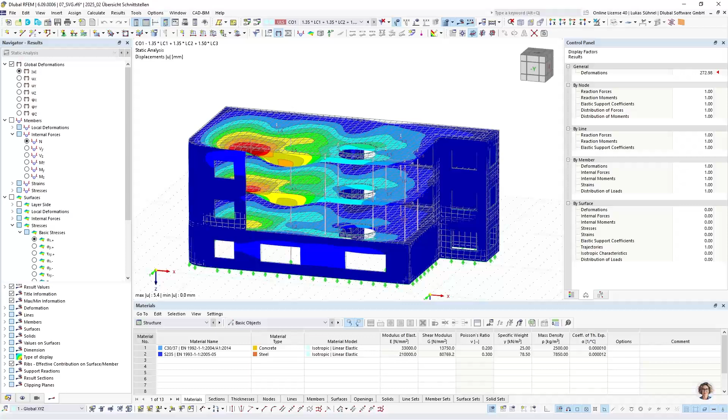So I will open another file again. For example, another concrete building. And inside that file, I have, for example, the rebars, the mesh reinforcement. Let's see. We can activate here the rebars. For example, it's for the members, but I think I also have some for the surfaces. Well, just partially. And let's say that is a graphic that you want to share.

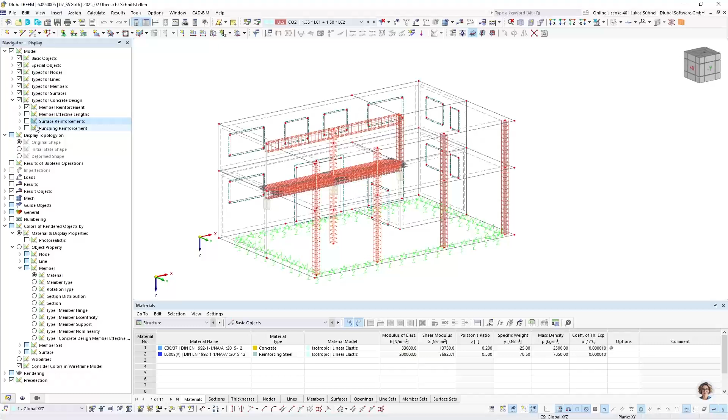Maybe you want to activate also additional information. For example, if we want to display the top and bottom reinforcements of these members or columns, or maybe even this information about the stirrups, 12 diameter 10 every 30 centimeter. So these are graphics you can create here in RFEM in the main window, and then you can export it into, for example, the SVG file format under File, Export, SVG, desktop. The name is okay.

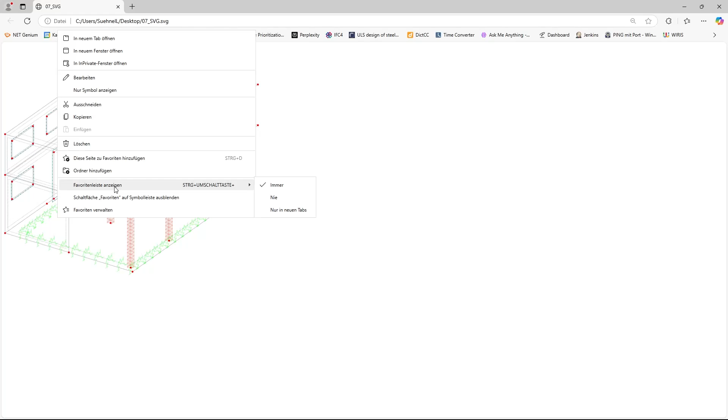And you can open these files with your browser basically. Just double click on the file. You can scale it, increase the size, and the quality remains really good. So that is the benefit of this file format. I personally don't have a real use case. Maybe if you have a nice graphic in RFEM that you want to scale for some reason for a presentation, it could be used. That's all I can think of.

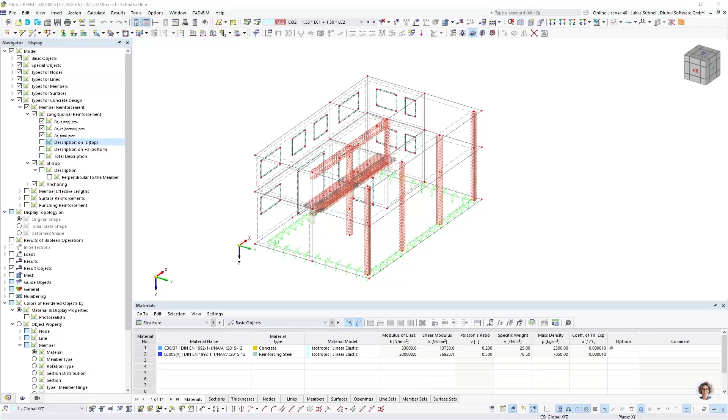All right, this was all the information that I wanted to share regarding our file formats. I hope you got a nice overview about them. Maybe you saw some workflows, or you got some information that helps with your workflow between the detailing and the structural analysis.